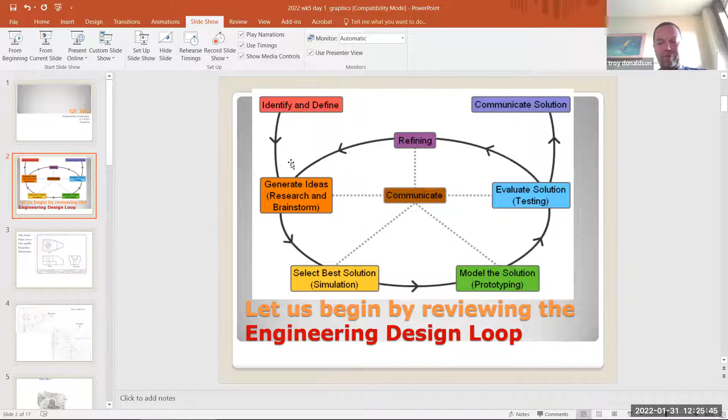Let me remind you before I get started that in our projects we want to try and run this loop as much as we can. You should be in this area generating ideas and brainstorming, those kinds of things, to document that information. All right, so let's talk about graphics.

So that can be 1 to 10, that can be 1 to 100, and you can also flip it and say it's 10 to 1, which means you enlarged it if it was a very small object.

Typically there are 3 views, and those are what are called orthographic views. Front, top, and side are the primary orthographic views, and they are flat views of a 3-dimensional object.

We want good line quality. What you're going to do for me as a homework assignment is some sketching, just pencil and paper, which I'll demonstrate. But we want as good and tight line quality as possible. We want the lines to connect nicely, not overrun or underrun or have gaps. There should be hidden lines for geometry that we cannot see, so hidden geometry, and then dimensions, like I said.

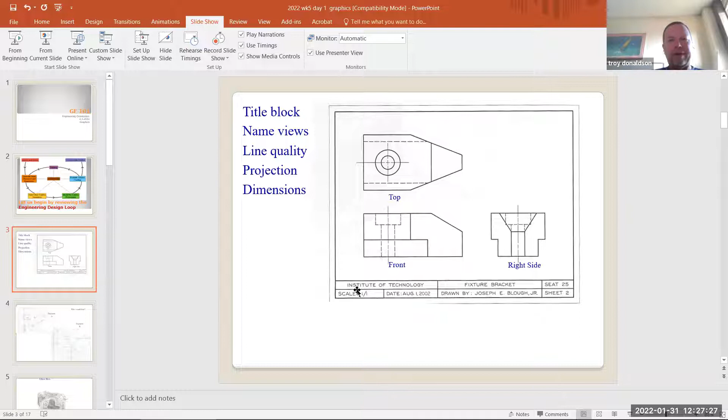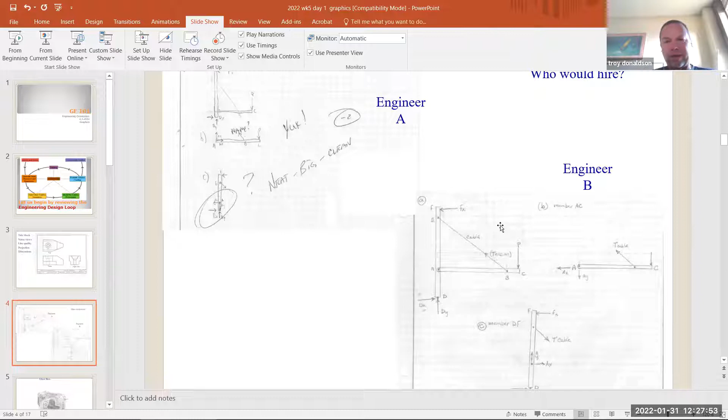So here's an example of some graphics that have been submitted in the past, and you can see my comments. These are students, actually not engineers, but which one do you want to be? You can see that they maybe even used a straight edge down here in this graphic. It's super easy to pull a straight edge out and use that, and it gives you a much nicer quality.

But let's talk about orthographic projection. Normally we're trying to document a 3-dimensional object, and we're doing it 2-dimensionally, on a flat piece of paper. That's going to involve the front, the right side, top side, and maybe some other views, but you're looking at the object kind of flat on.

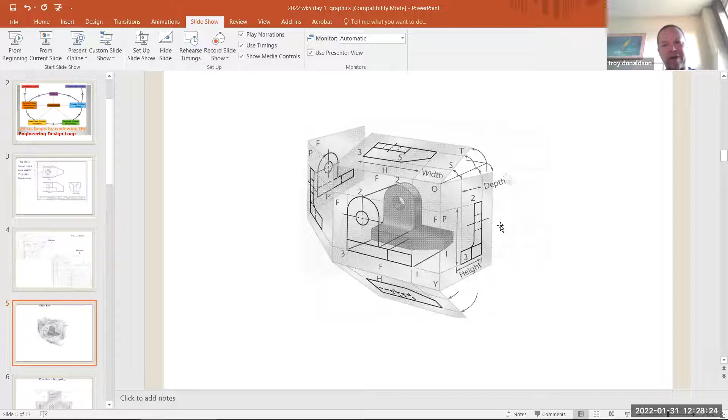So there's this thing called the glass box effect. It's as if you put a glass box around the object, and then you literally unfold the glass box. Most of the time, front, top, and right side is all you're going to need, unless it's a really complicated object, and then you might have to add the left side or some kind of auxiliary view.

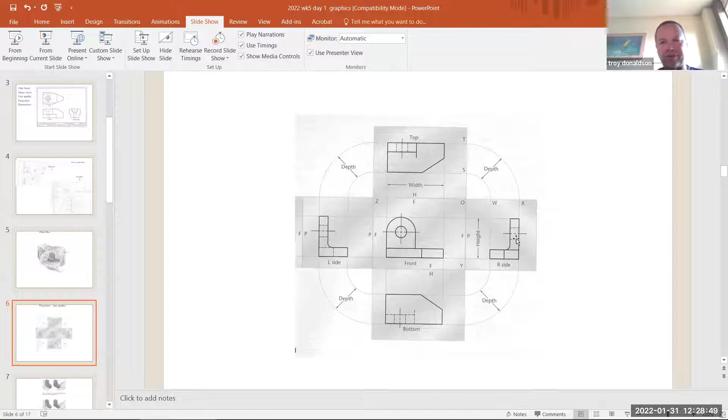Keep in mind that not all lines are true size and true shape when you do this, especially if you have a slope surface. In one view, you might see a true length, but in another view, like the right side view of this object in the middle, that foreshortened line is not true size and true shape.

So when you dimension, you can only dimension to true size and true shape edges that you can nicely see. You have to be very careful about what's true size and true shape and what you can dimension to.

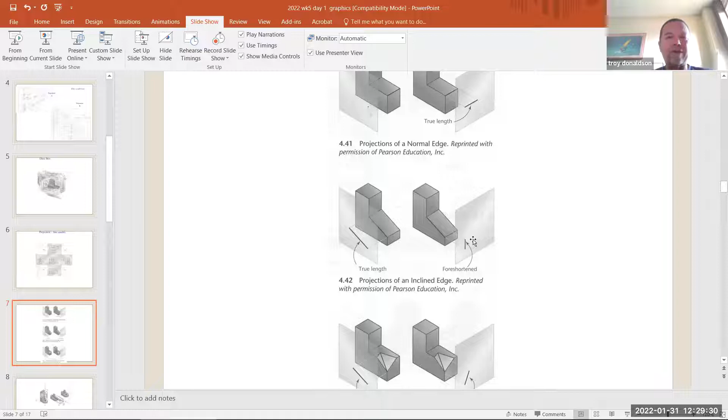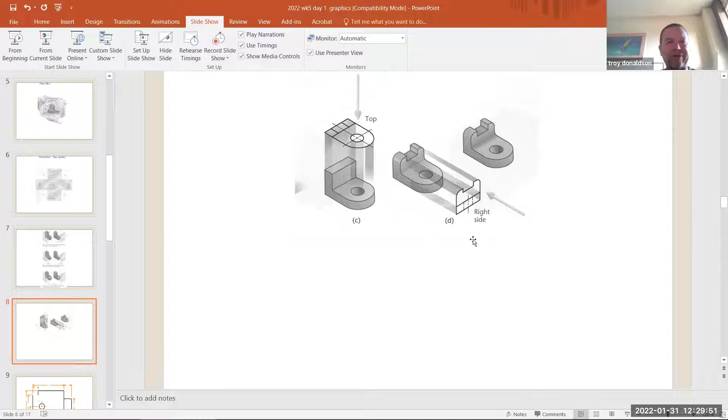Also, you cannot dimension to hidden lines, only to the visible lines or visible edges of an object. You can see the top view there—all of those lines are visible, we can see them. On the right side, all of the continuous lines are visible lines, and the hidden lines are the dashed lines. That's how we represent them.

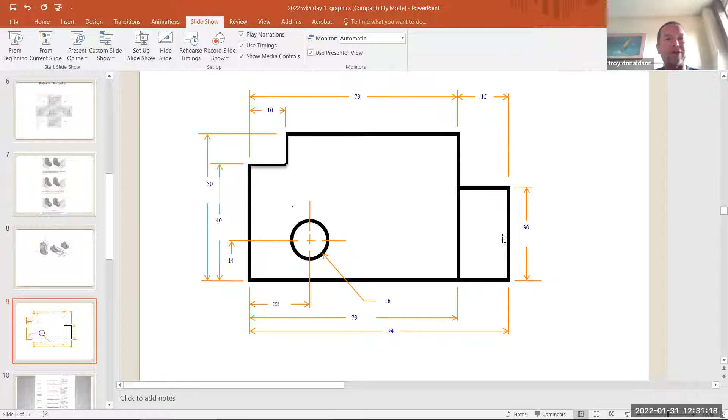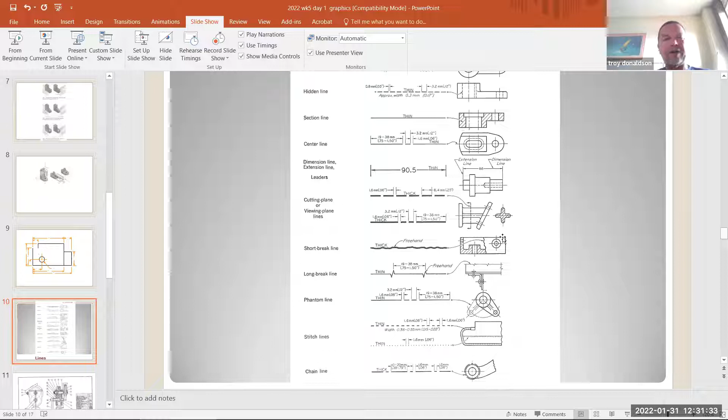There is a line type for everything—there are ANSI standards that we follow. These are some of the standards for continuous lines, hidden lines, and section lines. I don't need you to know that, but I do need you to know that there are standards and styles for dimensioning.

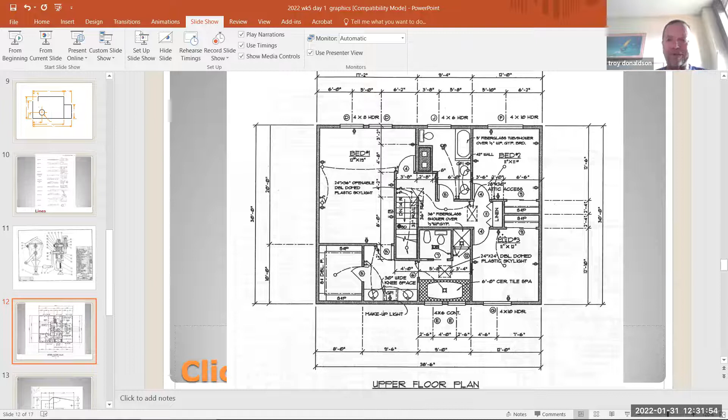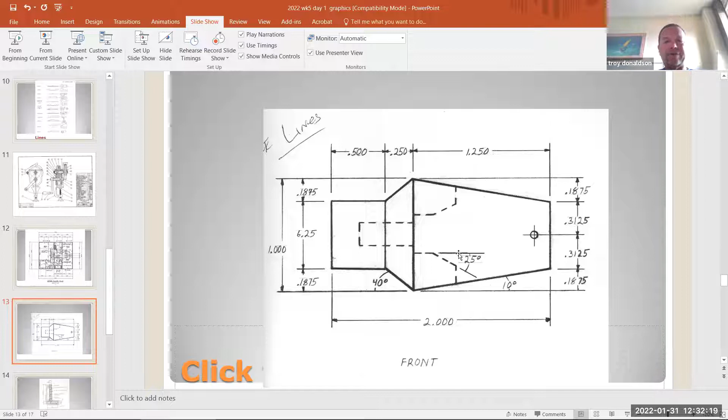This is an assembled view, so there's all kinds of controls so we all do the same kind of thing. This is a typical plan view, more on the civil engineering or construction side. This is a typical detail—a single view showing hidden lines and dimension lines, trying not to break any rules, but you can see the 25 degrees right in the middle of the object actually is on the object, which does break a rule. So there are many standards and organizational techniques to creating these kinds of graphics.

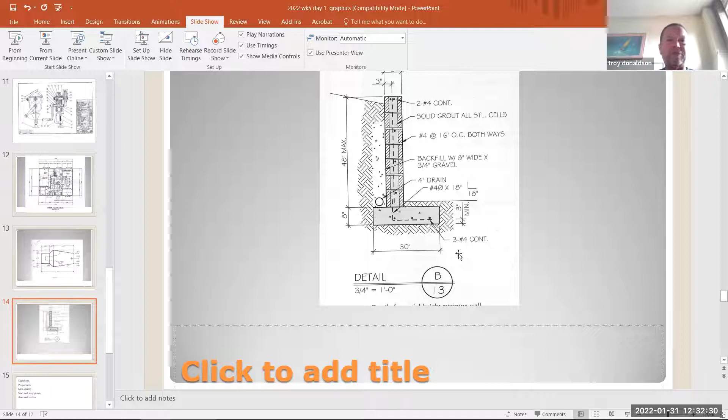Organization is the key, ability to read it is the key. Most of what you're going to do for me is going to be sketching, so I want to talk about that in more detail. Sketching has a lot to do with proportions, some decent line quality. If you use your engineering grid paper, it's going to really help you with your sketches—starting and stopping points, arcs and circles. I'm going to show you a few basic sketching techniques to give you some strategies on how to make them a little bit better.

Let's do a new share, I'll go to the visualizer. Hopefully it comes up. Let's see what's going on here. Unplug it and plug it back in. Sorry, I might have to pause the recording and get it going here, so hang on one second. All right, I finally got it to work.

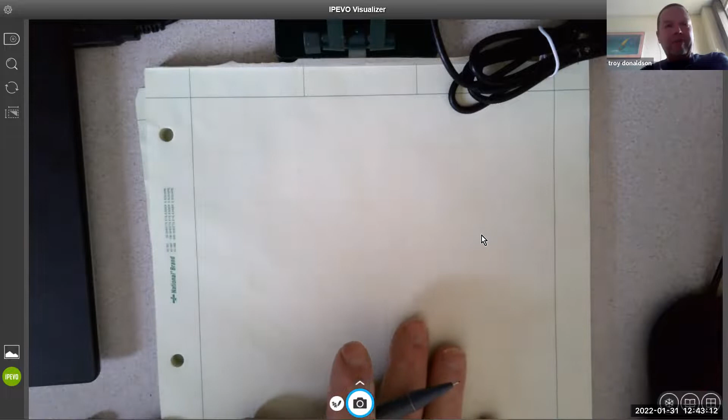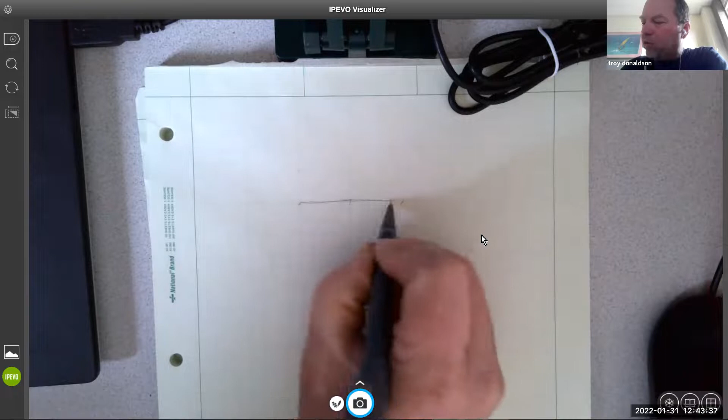I don't know why it didn't work, but let me just talk about sketching real quick. It's helpful to have grid paper, that's what I have going. The basic technique is you want to choose your start and stop point. If you have a scale set up, you know this is 10 units because I can see 5 is there, so if it's 5 inches per unit, 10 times 5 is 50 inches, that type of thing. You want to choose a start and stop point, then do short strokes to make your line—don't just put your pencil down and draw it, make short sweeping strokes and use your grid paper. Here's my stop point, use that.

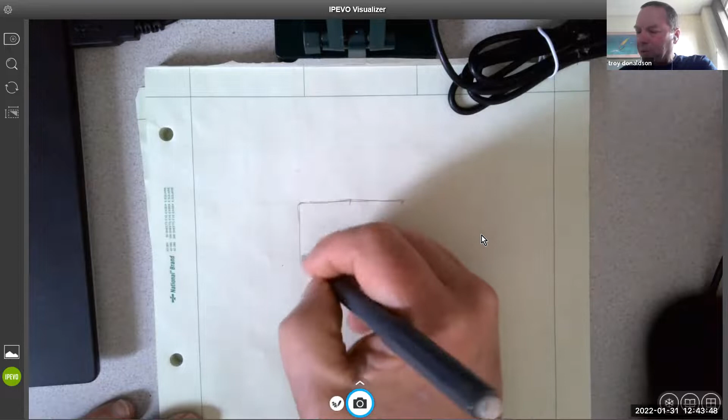So then if you have an angled line, again, you want to start and stop point. Then you want to work it from one direction to the other, and kind of bring it together. That'll give you the best, straightest line.

So that's basic horizontal, vertical, and inclined sketching. Give yourself a start point, a stop point, and then work it from one direction to the other and just try and keep it straight. And you'll get it.

Arcs and circles, box them in. So really lightly box in your circle. I think you can see that. And then choose your quadrants for your circle, kind of just pick them halfway. This is supposed to be a circle.

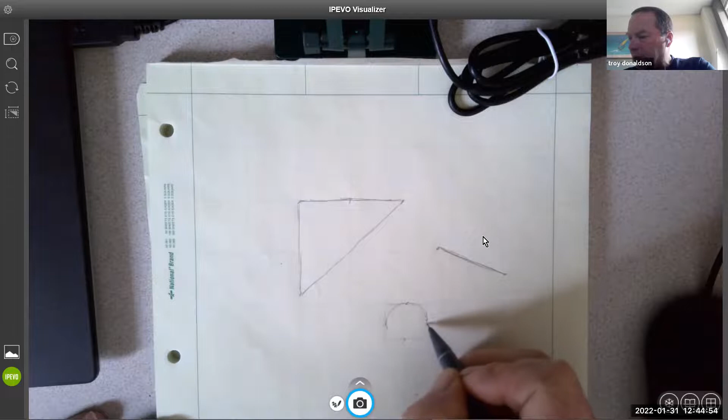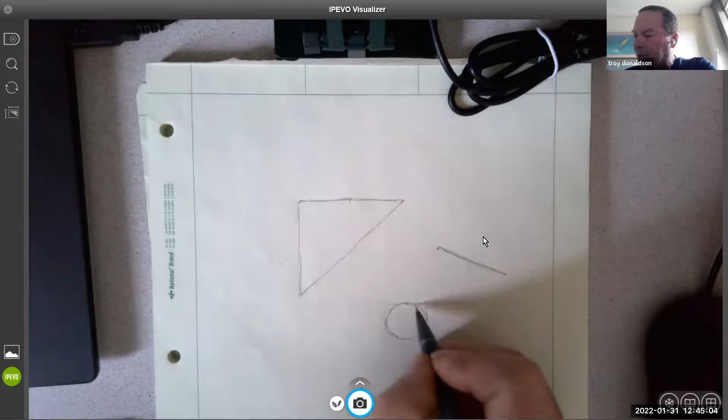So then you want to start tangent. These want to be tangent and tangent and tangent and tangent. So they start really flat and then you just kind of work them around and you can draw yourself a pretty good circle. Not going to be perfect, you are sketching, but it's going to be way better if you box it in.

So box those in, and then same with arcs. You would just box in an arc like that, and then choose your quadrants. And then the hard part is starting at kind of tangent, and then you can pull it out and you'll get some decent arcs and circles.

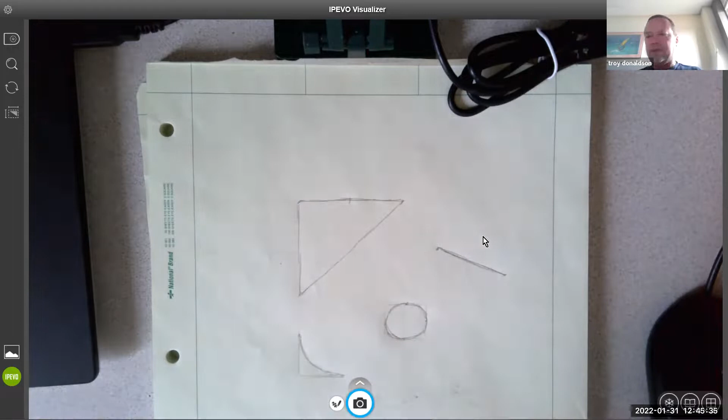You're going to do some sketching for me. You're going to do some front view, side view, and top view sketching. So let me stop this share and go back to, I know I get very big when we do that, don't I? Go back to a different share. All right, so what you're going to do for me

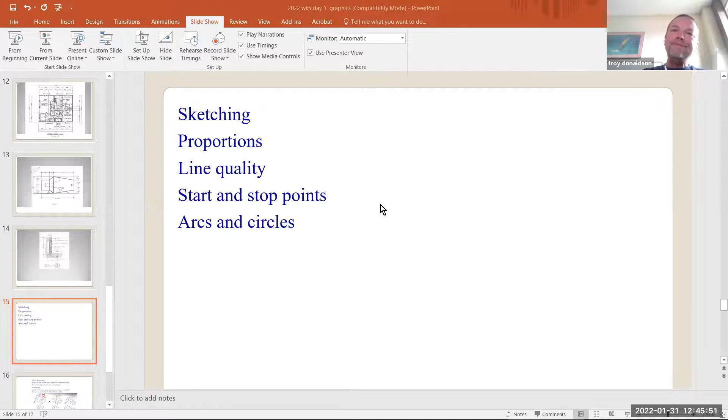is you have a little homework assignment, number 1 and number 8. You're going to sketch for me with the straight edge or without, it's totally up to you. A pencil on clear paper, so like printer paper. If you don't have any of that, you can get some from me tomorrow during the lab. You can put your green paper behind it and you'll be able to see the grid come through.

So then you're going to sketch a front, top, and side view of these objects, number 1 and number 8. A size paper, that's 8.5 by 11 normal pieces of paper. And then include a sketched up title block, a scale, and your name in there. So get all of that going.

And what I want is I want you to use a grid size of 4 inches. So each grid, if you look at number 1, you can see it's broke up into these grids. It looks like it's 1, 2, 3, 4, 5, 6, 7 grids wide in the front view. So that would be 7 times 4 for the size, 28 inches. So you'll have to think about doing some scaling to get it down. So 4 inches by 4 inches for each grid. Draw me a front, a top, and a side view for number 1 and number 8.

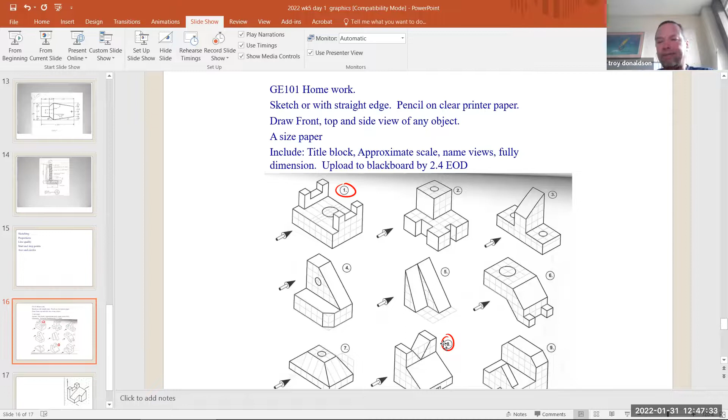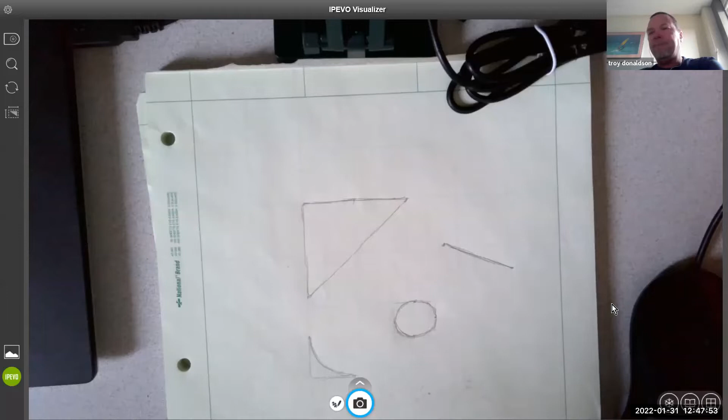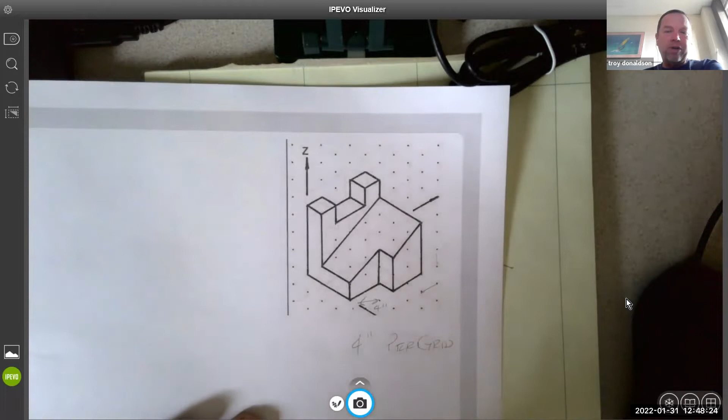And if I said that it's 4 inches per grid, that means that for every grid, that's 4 inches. Now, some of them will have half grid spacing, so just be careful to make sure this is full grid, that's full grid. So there's no half grid in this one, but go back and look at those more carefully and see maybe they have some half grid here and there. But that essentially would make this 8 inches. This would be 1, 2, 3. So from here to here is 24 inches. So 4 inches per grid. All right, I think you got it.